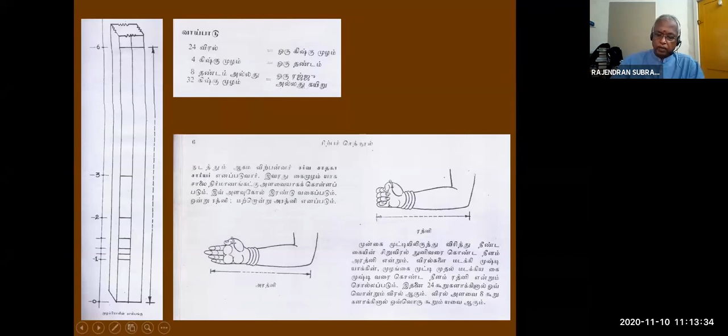Now there is another measure, the atom. 8 anu is 1 terthul - terthul means dust. 8 dust is 1 imi. 8 imi is 1 yellow - yellow means what you call gingerly, sesame. And 8 yellow is 1 nell - nell means paddy. 8 tips of that sesame is 1 paddy, and 8 paddy is 1 thumb, periviral.

And this is how it has been taken from the Silappatikaram, the epic Silappatikaram, which was written nearly 2,500 years back. And that is the thing - in English, angulam means 1 3/8 inches.

Vidasti means 12 fingers. 12 into 1 3/8 equals 1 foot 4.5 inches. Kishku means 2 Vidasti, so 2 into 1 foot 4.5 equals 2 feet 9 inches. That is the stick they used.

But you see, the Tanjore system, Tanjai meaning Tanjavur system, followed a different way: 24 fingers, then 24 thumbs. That measurement is 2.9, Chidambaram meaning 2 feet 9 inches. Chidambaram means 25 thumbs, that is 2 feet 10.375.

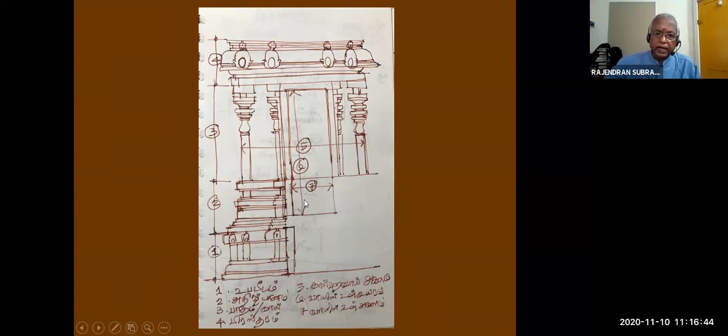And 6 is the entrance inner, from here to here, that is below the lintel. This is the door jamb, door top block, and the bottom is door jamb.

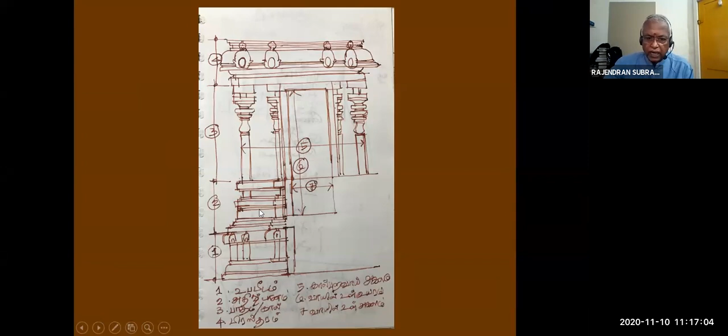From this bottom step stone, this distance is called Vayil Ul Uyaram, Vayil Ul Agalam. Agalam means width, meaning this measurement is from the door jambs, leaving the door jambs. These are the basic things, okay?

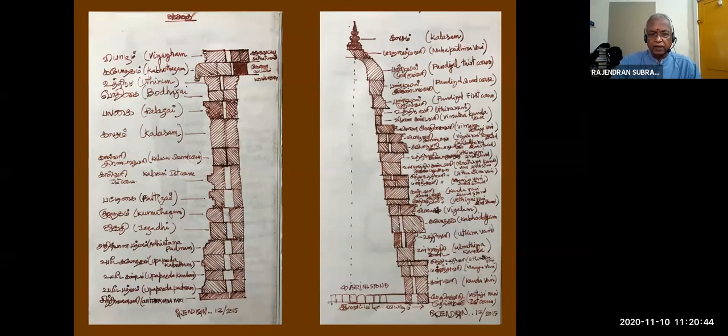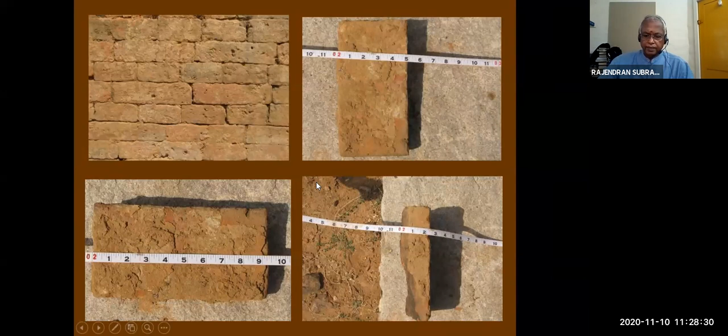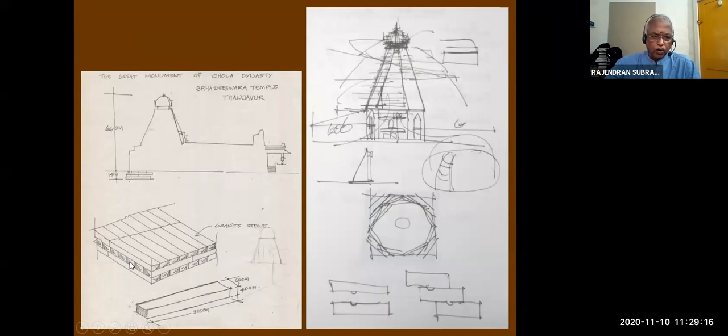It is followed like this - the bottom stone was dressed manually, they dressed it so nicely. The size is approximately 40 to 45 centimeters, width about 60 centimeters, length about 3.6 maximum, less than 3 or 2.8 like that. They placed the first row in one direction, either east-west. The next one similarly is done north-south, and the other one again repeats that.

Between this, they have a ball and socket - look at this way. The top one will have a ball and the bottom one will have a cup-like arrangement, so that lateral movement doesn't slide. You know, the depth of foundation of the big temple is only 1.5 meters, 5 feet. Imagine the height of the temple is about 66 meters, 216 feet, and the depth of foundation is only 5 feet because this technique has been followed.

This is nothing but what we call modern engineering now - we call it a raft. A huge reinforced concrete base is created. On the base, the rod goes to the wall, so the wall rests on that. Through the wall, the load gets dissipated to the foundation, the raft.

But here, they have done everything on stone, so there is no mortar in between, mind you. And it is so nicely dressed by hand that not even a paper can enter.

We had seen the foundation of Dharasuram, which was later constructed during the Chola period only, and we knew the same system has been followed. That has been verified by the archaeological ASI - ASI people are maintaining it. I have verified with many ASI people, the sculptors, all those things. They say there is no mortar in between. I have seen the foundation depth also - once they wanted to test it, we saw it, 1.5 meters.

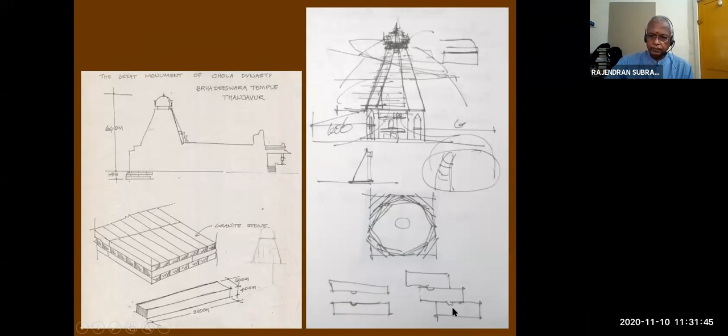Coming to the other side, look at the foundations, how the stones are fixed. There is no mortar. This is in Dharasuram, Kumbakonam. Look at this, the joints are staggered. Mind you, all these things are very, very important. What we do in brickwork, they have done it in stone.

This has got a locking system so that it resists lateral movement, this doesn't slide. See, the joint is here, it comes here and goes, this is the top, and the joint is here. So this joint and this joint do not come in a straight line. It doesn't come there, it is here also, like this. So the interlocking is there, and see the slight shift.

So it is only placed over that, and this can be removed. When I had done repair works for temples about 1,200 to 1,600 years old, what we do when we remove the stones is put a number showing from which direction. Either we follow from northeast, go around clockwise, and start the numbering from there, from top, row number 1, row number 2, row number 3, like that. We come down, number it, and place it aside. The first row will be somewhere outside, second row will be next to it, like that. Once we complete the repair, we again replace it over that, like this.

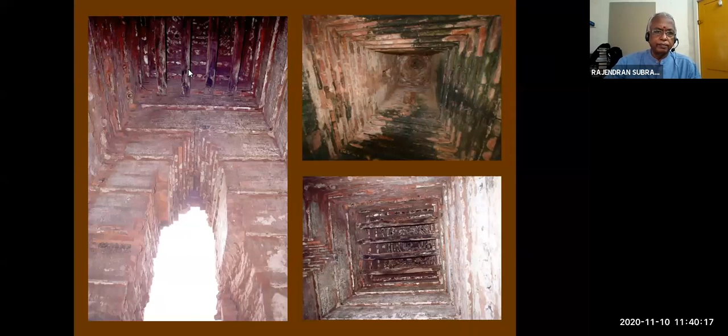See, look at that corbelling inside. Corbelling is a system to reduce the span—gradually they reduce the span. Look at this beautifully done, renovated work. Look at this, look at that. You see from bottom to the top.

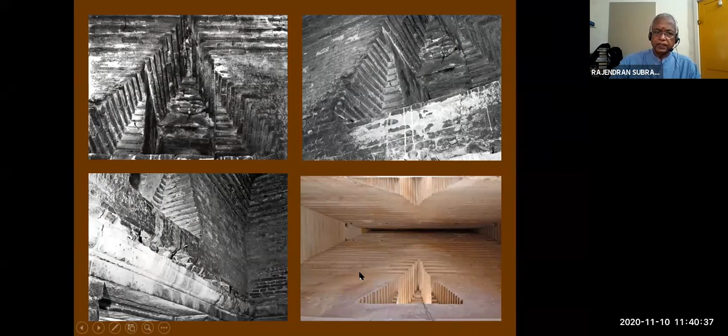The simple example for the Venturi effect is: open your mouth and blow—ha, it'll be warm. Keep your mouth like whistling and blow, you get very cool air. That is a simple example for the Venturi effect. That same thing has been followed 1,000 years back. Their knowledge of science, architecture, and engineering was so good.

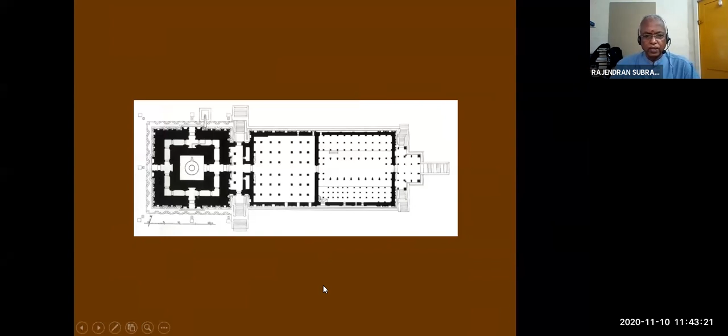This corridor contains beautiful paintings from the Chola period, vegetable paintings, the colors they used. The next tier has karnas, 108 Bharatanatyam karanas. They only finished 81, the rest they left incomplete, they couldn't complete it. They had 3 floors over that - ground floor, first floor, second floor. They had this going on as a tribute to Linga Shiva.

They used to shower flowers from that. Look at this, it showers from there. All 365 days, there were celebrations like this.

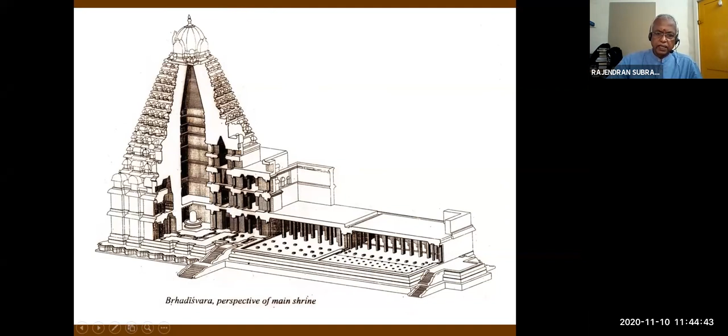The next one, see this is another cross section. All the backdrops, 2 tiers of circumambulation, the corridor, 2 tiers. That has been demolished, only 1 tier you see now, that's all the rest you see. This is the thickness of the wall. Again, another direction, see the thickness. This is 11 feet on this side, 11 feet here, and this is 13 feet, this is 6 feet. The gap is 6 feet. It comes all round, this also comes all round.

Here there is a painting, here there are sculptures. The painting is maintained because the color is real, you can see the real red, real green, all with vegetable dyes. They made it 1,000 years back, and it's still alive, still active. The Nayaks had overlaid the paintings with their own style of painting using lime plastering. That has been gradually removed by ASI, Archaeological Survey of India. The whole temple is maintained by ASI.

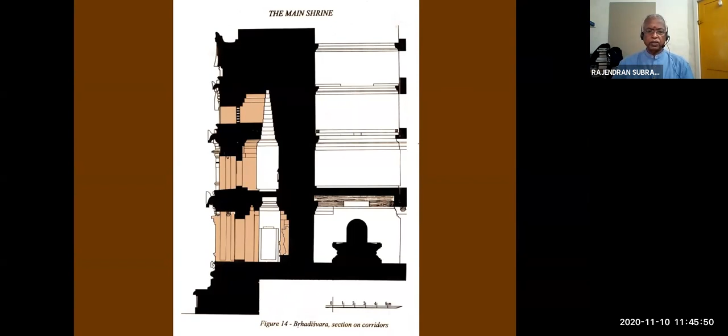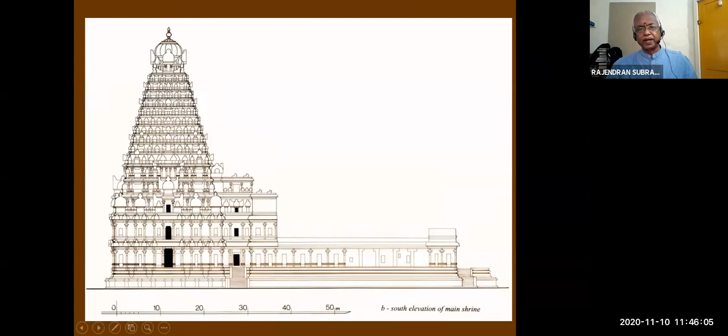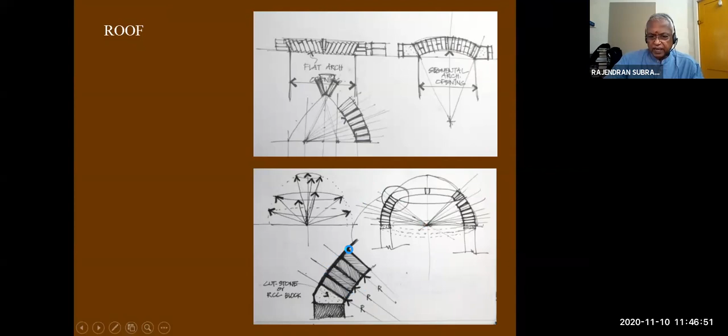Now see how a dome is done. Watch, it is done without formwork - a vault without formwork. See from here, a radius, how it is maintained. Look at this, you yourself can do it once we do a hands-on workshop. We can do that, don't worry - once the corona situation is over, I'll come there and do it for you. Look at this, I use this - they call it a swivel eye, or twisting eye.

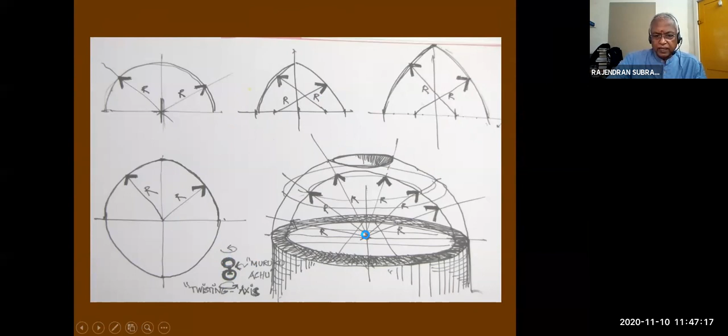This is used in one axis, this twist. I tie that at the center, use a string or a wire, non-expandable mild steel or any chain, and I rotate it around that. The same blocks are placed at the same angle. That's how we do the dome.

Look at this, one of my works, I've done a lot of domes. I did one for Sasikala Anand also, architect Sasikala Anand who writes in The Hindu. This is another one, see the slope. I did that swivel eye like this, so the slope is maintained. Same way I've done domes.

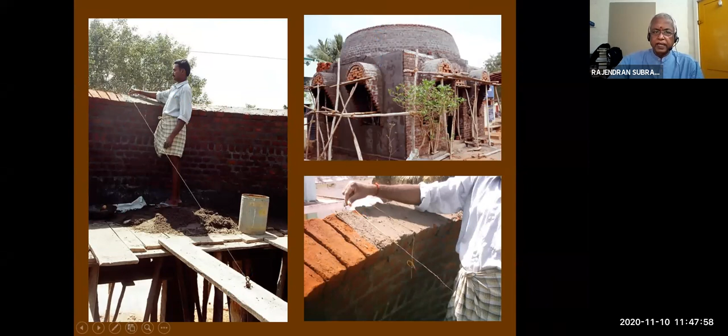Then coming to the vault - how is the vault done? Single groin, there will be a groin at the top. So how is it done? See, this is drawn, from this you divide it into 3 or 5. Take from this point, you take a curve.

From this point, you take a curve like this and start doing it. The string will be there. You place the brick based on this string slope, and from this slope you continue. Finally, it will converge and come to the center.

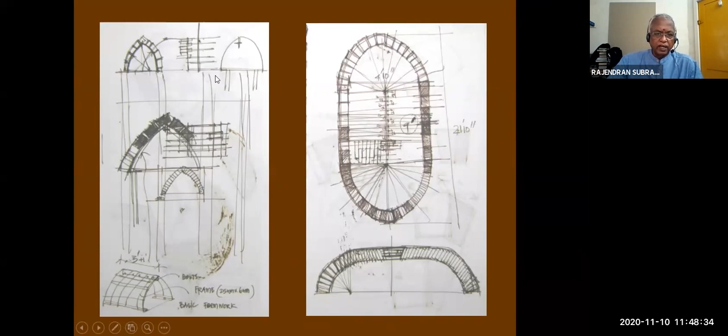You will seal it. I had used small steel angles to guide, not so many, only 2 or 3. You can see how the stones are placed.

Stones with lime mortar. I had revived this technique, which was done by the Cholas. Now we are doing it, we are following it. A lot of traditional Sthapatis are doing it too. Look at this.

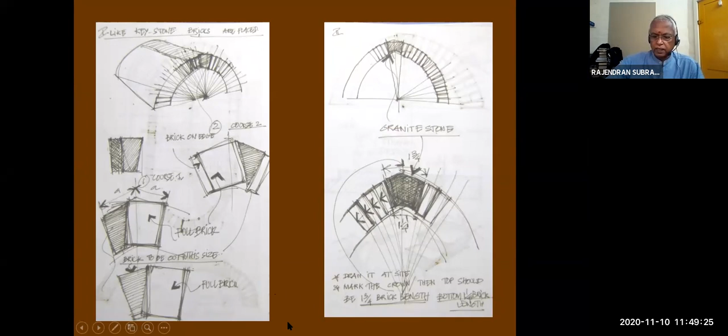I've done some work for Vijay Ramachandran, an architect from Bangalore, who had his early studies and masters in the US, came to India, and wanted to construct something. Ford Foundation gave him money to do orphanage work in Trichy. I was one of the consultants for the vaults for him, and we did a beautiful building.

This is how the vaults are done. Again, these are things I had introduced. We can go for a stone vault, stone without mortar. You place the stones, cutting them in a trapezoidal fashion, and place it from here to here.

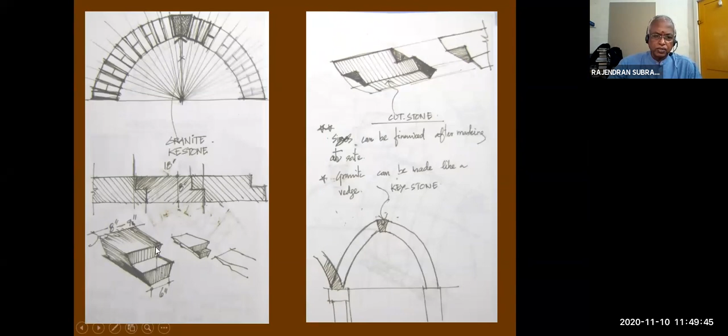Simultaneously it has to be done. Once it comes to the top, you use keystones like this type, and you don't need mortar in this. I did this for a temple about 800 years old that was in a dilapidated condition. We pulled down the whole structure and did new work, using this technique.

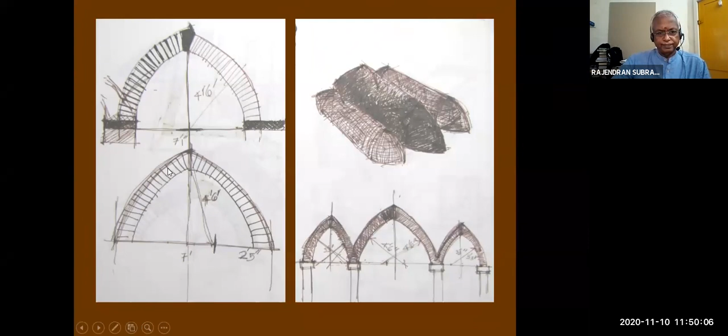See, something like that, how it is done. Here the client wanted a prototype, so I did it. This is a line, and we know the distance based on the site conditions. Then I made it into 3 divisions.

From this division I put an arc, and from this center point I put another arc. I left the string as it is, this binding wire here and here. Then we did that with lime mortar. Look at this, the convergence, how it is converging.

This person, I think you must be knowing, is architect Ramalingam from Madurai. These 2 gentlemen are great traditional architects from Kumbakonam - this is Vilinathan Acharya, and his younger brother Sumabadi Acharya, also from Kumbakonam. They have 450 years of manuscripts from their family, the Vishwakarma family.

They are running a beautiful Gurukulam, run by TVS, and these 2 people are in charge of it. For Vishwakarma dropouts from 10th standard, they educate them and convert them into Sthapatis. This young architect is a trainee. So they are observing. Look at this, how it is converging.

Automatically this will converge, with lime mortar. The lime is grinding - we do the grinding with a commercial grinder. This is how it is done. Architect Ramalingam is keenly observing that.

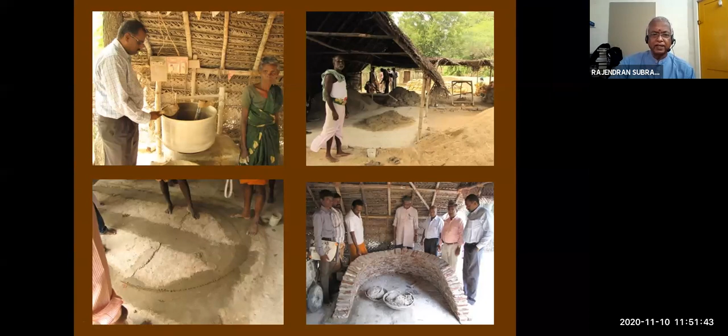Look at this - only these 2 steel angles, flats, I used as a guideline. Here I place a stone, and then here I place it. Then I used ropes like this. See this, how it is converging. Before that, the bed block is done with stone.

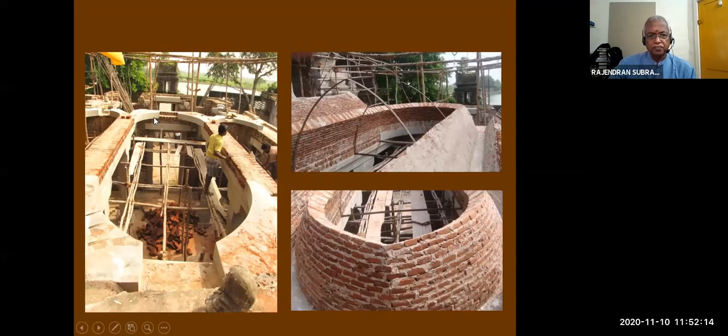We combine modern technology - we cut it with machines, these types of squinches, and use them. And it converges, it comes together. One is over, the other is going on. Look at the stone we used for the squinches and bed blocks, here, with lime mortar.

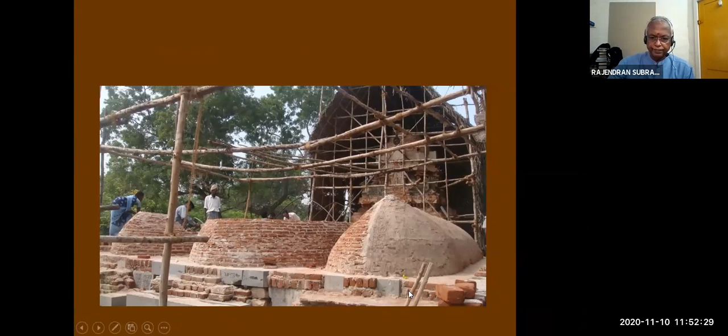We had completed this. This is another existing one, about 850 years old, by Nayaks - no, Chola originally, later repaired by Nayaks. Look at the bricks, how it is, beautiful, you could see that. Here, see the joint - the same outside appearance.

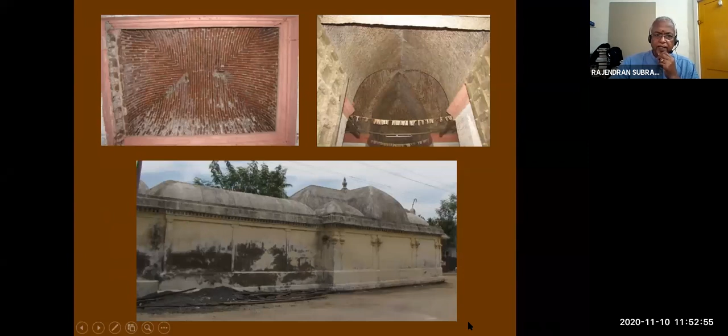See another great one by the Cholas. This is for a temple car - they had placed a shed. Look at this, this is about 15 centimeters, and at this point about 1 foot and odd. So it is gradually decreasing.

See how nicely it's done. You know why they use small stones, small bricks? By surface tension, it stands - once you apply mortar over it and stick it to the next brick, it will remain. If you have a thicker brick, the absorption of mortar is not there, so it falls, it slides under its own self weight. So they always go for smaller bricks.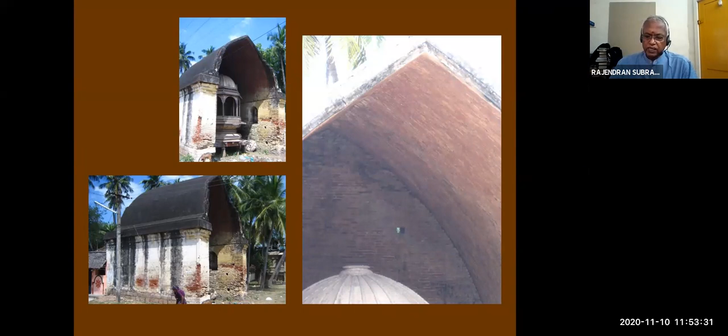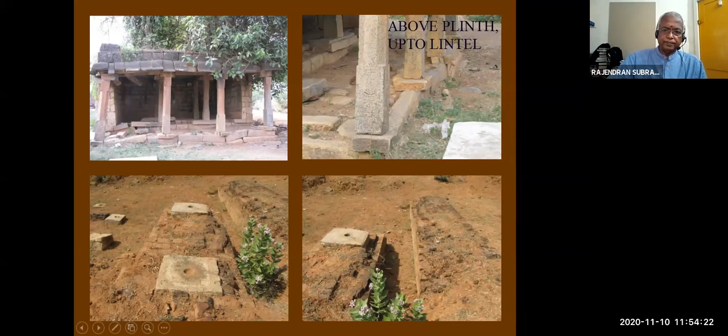See, another one. I made two postgraduate structural engineers analyze and say how safe it is in a simple way, like L by B ratio. So they had done it, they had marked it. It is a simple 4-pillar Nandi Mandapam at Erumbeeswarar Koil in Thiruverumbur.

On the way from NIT when you go to Trichy, you see this. There is a small hillock on the right side after crossing Thiruverumbur. That is the place where you see this.

See, this is a simple principle. This is a foundation stone, that's a bed block, again big stones. Over there, the column, over the column there's a bed block, over the bed block there is a beam, and over the beam you see another pavukal right across the slab.

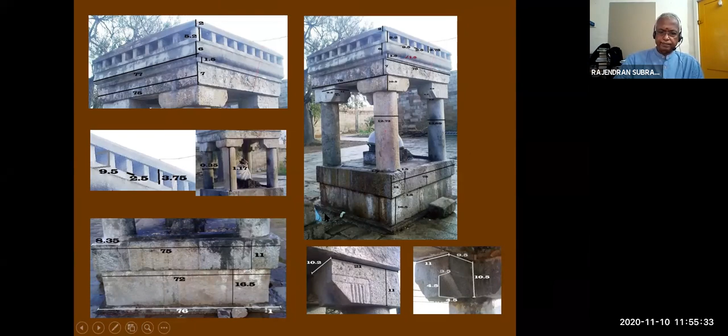See the temples, how they are made. Whatever I said about the grammar, following the grammar, they had used granite. And the joints, inside will be slightly higher, outside will be lower, so that rainwater doesn't creep through and seepage won't be there.

So that's a stone, see the stone kalasam, Padmam, that is a lotus, and all this. They followed the grammar very strictly. It changed as the centuries grew, gradually the styles changed as per usage, and when there was a new introduction somebody tried to introduce something, but they never broke the basic system.

See, look at this, Salagaram they call it. Jalis made out of stone. All handmade, not machine made.

The same temple we repaired, but we followed a machine made system. See, the granite is cut with water, do you know that? So thin, like a jali. Granite - I want to show you that so you understand how it cuts.

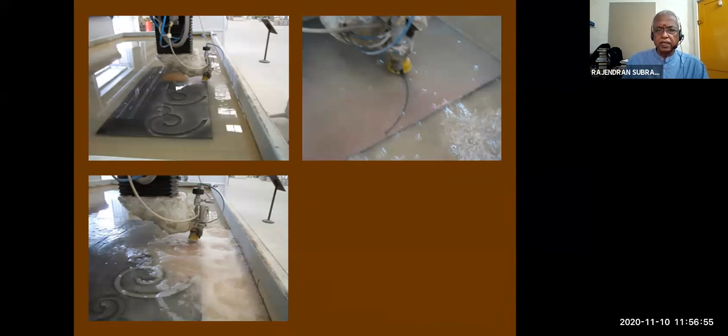The high pressure jet cuts the material. See, here it is cutting inside water. Water cuts stone. You cannot believe it, no? It is happening. That is how thick granite is cut into very thin sheets. They have even made visiting cards in granite using this water cutting.

You know why they cut it with water? When you use steel or something, it generates heat. Once it heats up, the whole stone breaks, it cannot withstand the heat. So they cut it by removing particle by particle, microparticles, with the high pressure jet.

Right, I think I have covered generally from foundation to top. Any questions you can ask, interaction, I'm welcome.

I think you wanted to ask, ma'am, what is your... Amazing, sir. Whatever you want, okay, I have given it now in a short span. Yes, sir, actually spellbound, listening to you. 12 o'clock now. Very nice, very nice. Any questions?

Thank you so much, sir, for this highly inspirational presentation. Totally enjoyed and admired it. I hope this can be an inspiration for most of us who would like to go into this field of architecture also, and hopefully our future generations get an opportunity to meet someone like you again who will be addressing students like us. Definitely, so totally. So thank you very much, sir.